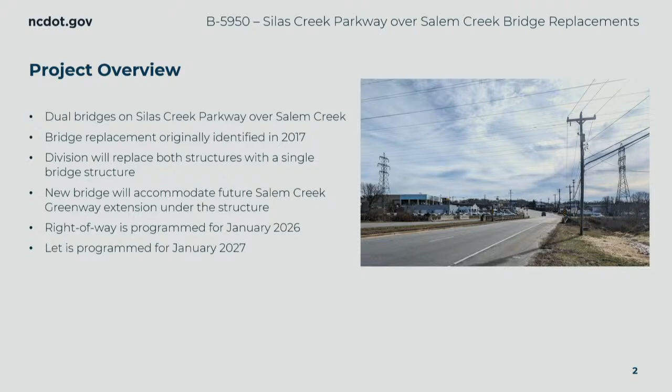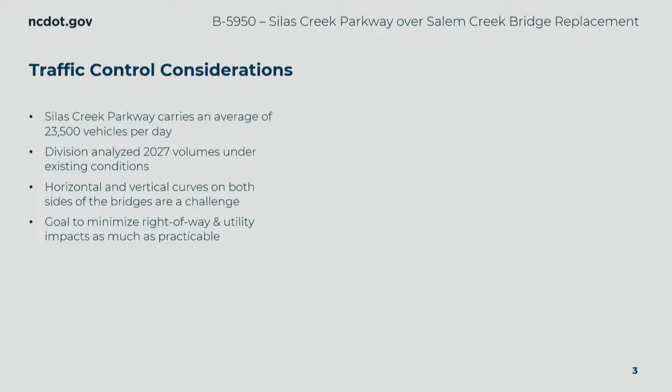As you all are aware, Silas Creek Parkway carries an average of almost 25,000 vehicles per day in 2023 volumes. So we took the current traffic conditions and forecasted them out to 2027 to look at traffic conditions in a no-build situation. The graphic before you shows level of service values using 2027 volumes. If you travel this section of road in Winston-Salem, you probably are familiar with some of the values you see. Relatively speaking, the intersections function well, but there's obviously a delay during peak periods.

Some of the challenges we face when looking at replacing these structures is the geometry of the roadway coming in and out of the project site. There are horizontal and vertical curves on both sides that present challenges. There's a lot of commercial activity within proximity of the bridges, so our goal is to minimize right-of-way impacts to those businesses. There are also a lot of utilities, including 3 large Duke transmission lines that run overhead of the structures, presenting some unique challenges with respect to utility conflicts.

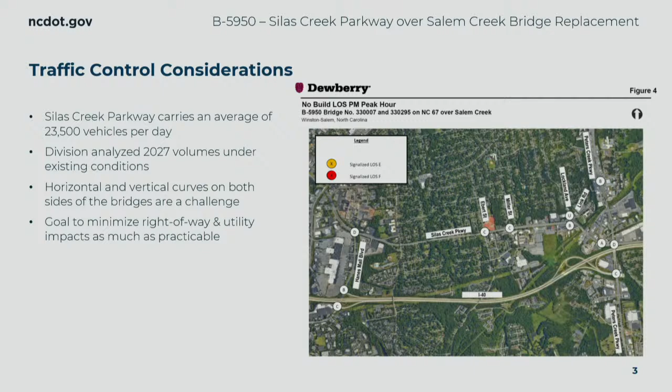So the division first took a look at potentially staging construction of the bridge replacements. What we would do is put traffic onto one of the bridges while we constructed a portion of the new structure. We could either reduce Silas Creek Parkway to 1 lane in each direction, or we also looked at detouring 1 single direction. Particularly when you close the westbound direction and try to detour it back in, tying that into the Lockland Avenue intersection becomes almost physically impossible.

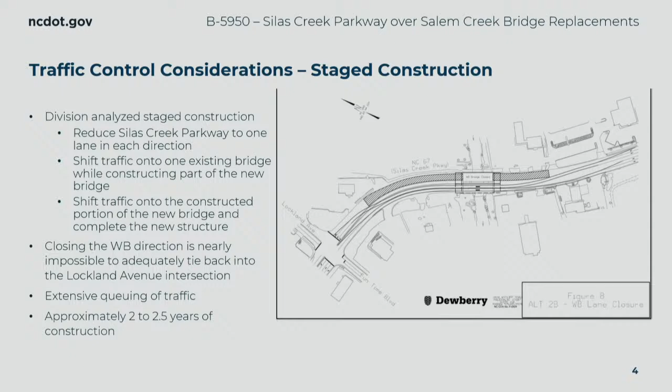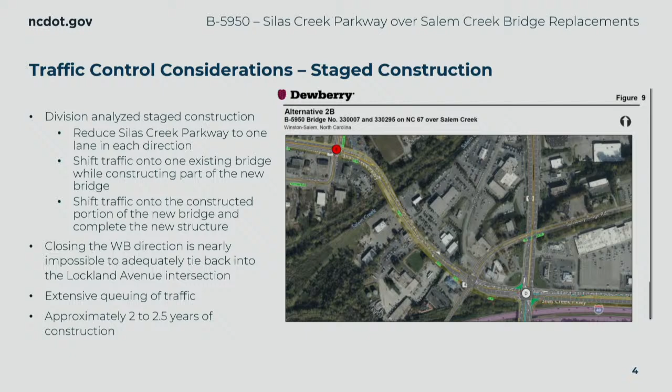We also saw in our modeling some extensive queuing of traffic. It's a little hard to see here, but this shows the AM peak hour detouring 1 direction, and traffic backs up all the way from Lockland through the Peters Creek Parkway intersection almost to Buchanan Street. The other thing we find is that to construct the bridge this way would take more than likely 2.5+ years of construction.

So we shifted away from one lane each direction and then looked at detouring just one direction. You could flip eastbound or westbound, maintain two lanes in each direction, but detour the other. What we find is the pain is very similar to putting Silas Creek Parkway into one lane each direction. You see similar level of service values, and your delay times and travel time impacts are roughly the same, and you're still stuck with a construction duration of 2.5+ years.

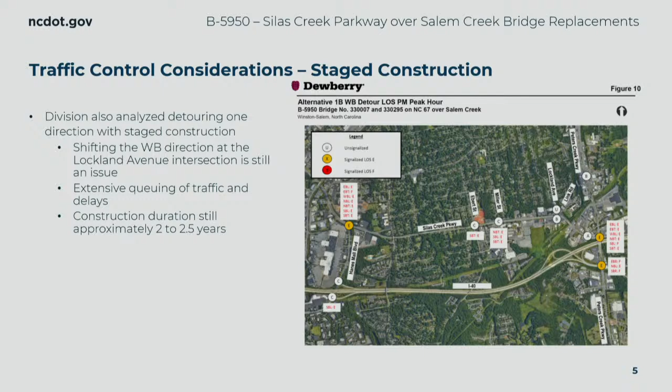So to summarize what we're seeing in stage construction: we have poor level of service within the project impact area. When you shift traffic into these configurations, it limits access to businesses in proximity to the project. The driveways are so close it would be very difficult to maintain all access points in this configuration. Because of the separation required between the existing structure carrying traffic and the new portion being built, we'd see wider right-of-way impacts and more utility impacts. And again, we're looking at 2.5+ years of construction.

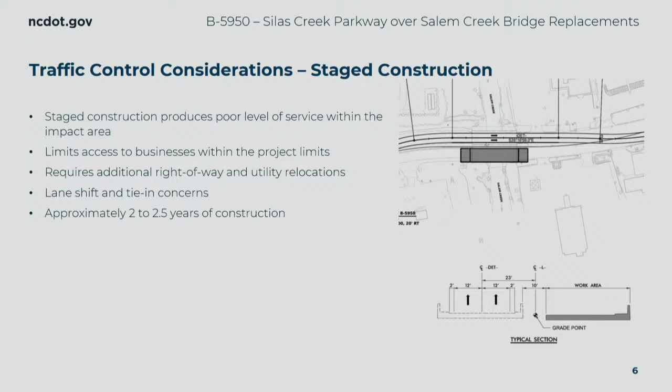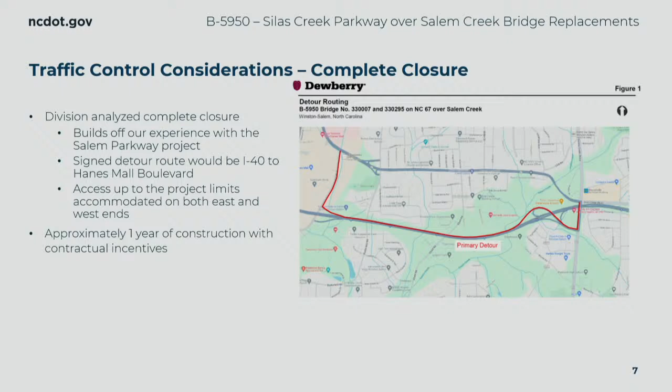So we asked the big question, drawing on our experience from the Salem Parkway project, Business 40: what would happen if we closed Silas Creek Parkway to replace the bridges? We would sign a primary detour route using Peters Creek Parkway, I-40, and Hanes Mall Boulevard. We could accommodate access to commercial entities up to the project limits on both the east and west ends. Most importantly, we could reduce the construction time during full closure to approximately one year with contractual incentives. We talked to contractors actively working for us who have done a lot of these projects, and they agreed a one-year time frame with a complete closure would be doable.

But as you can imagine, that's pretty painful. You see a lot more red on this graphic than in previous ones. What we did here is assume that all 25,000 vehicles per day would use the primary assigned detour route, modeling a worst case scenario. What we learned during the Salem Parkway project is that people find a way—local traffic will utilize alternative routes. But for the purpose of our analysis, we felt it important to see what we can do assuming all of that traffic.

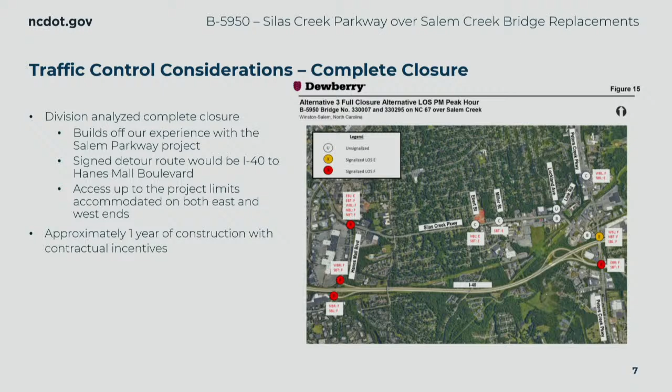So we had our Dewberry team look at mitigation measures—things we can do within this impact area to mitigate the full closure. This is our first pass at potential mitigation measures: simple things like signal timing adjustments along the corridors, restriping existing lanes, and changing signal phasing at key intersections to utilize as much existing pavement as possible, handling turning movements that get turned upside down by the additional traffic.

What we found is we can get the intersection level of service and delays roughly to the same level as in the stage construction scenarios, but we can do it faster—painful, yes, but completed in half the time or better. We feel there may be more we can do; this was just a first pass, and as we get further into design with Dewberry we'll continue looking at options. These mitigation measures would be part of the construction contract and implemented prior to the closure.

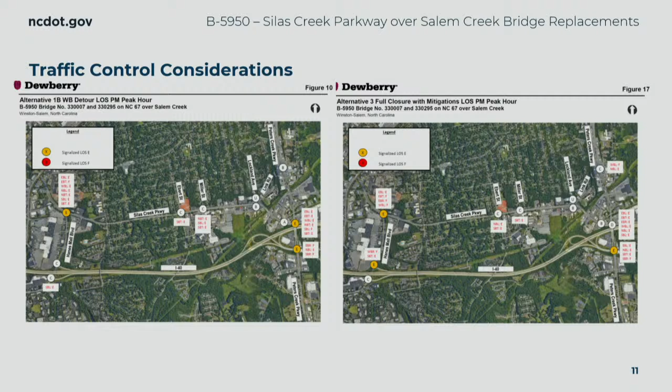So some next steps - what we envision, it's January of 2024, so we're a long ways away from that right-of-way date, but we started planning this project early because we knew this was going to be a challenge. Dewberry is going to proceed with that full closure design, matching roughly the existing footprint of the two individual structures.

Probably the next big ticket for us is trying to identify the utility conflicts, particularly the impacts from the transmission line. Where that has an impact on us is more around constructability - the ability to get equipment underneath those lines and clear them in order to build the bridge.

The other really important component is public outreach. Our vision at this point is some targeted meetings with the businesses within the project area. We want to meet one-on-one with those businesses and talk about access to them during the closure - what can the department do as part of the project to help allow that, and try to get out in front of some of those questions. We also want to meet with some of the institutions within the impact area.

Forsyth Tech obviously stands to be impacted by what we're proposing, and of course Novant Forsyth Medical Center. We've also been talking with Mr. Fansler and Winston-Salem DOT about the WSTA route that runs on Silas Creek Parkway, trying to figure out how we can accommodate that during the closure. So we're trying to do that outreach early and find out what concerns these institutions may have and how we can try to address that.

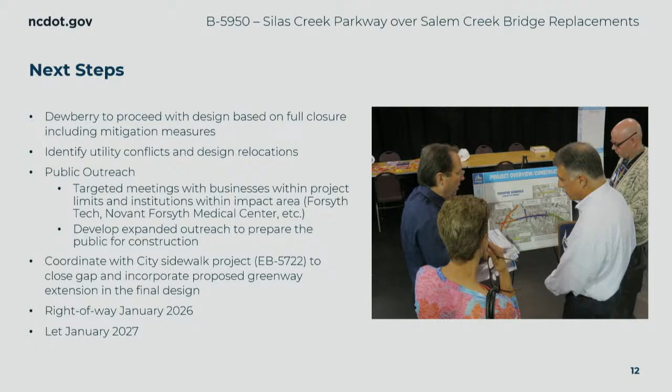That's all I had, and I'm more than happy to take any questions and try to answer what we can. If we don't have the information today, we'll certainly try to get it back to you. Great, thank you Ryan. Yeah, questions from committee members?

Councilmember Scipio: Yes, just to be clear, our roads are so well constructed there's oftentimes you don't notice there's a bridge, so I was sitting here trying to figure out exactly where on Silas Creek. The only thing I could think of is down near Bob King Auto. That's correct. And Quality Oil - yes, that's about where that is. But to replace that bridge, it looks like you're having to go all the way up.

Are you going to go beyond Ebert Street? No, our project limits will probably stop short of the Lockland Avenue intersection. And our goal at this point - you mentioned the Quality Oil site - there's a Shell gas station that sits out in front of Quality Oil's facility there. Our goal would be to try to tie Silas Creek Parkway back in before we get to the gas station, since their tanks and facilities sit very close to the existing roadway. We'd like to avoid any impacts to their site if at all possible.

Yeah. Thank you. Other questions? Councilmember Mundy? I want to make sure that committee members have had an opportunity.

I don't think we've met, but I'm Kevin Mundy, council member for the Southwest Ward. So I've got a couple of questions. One was where you would start and stop, which you've just answered. At what point would you address the businesses? Because I always worry about them hearing it from somebody other than us.

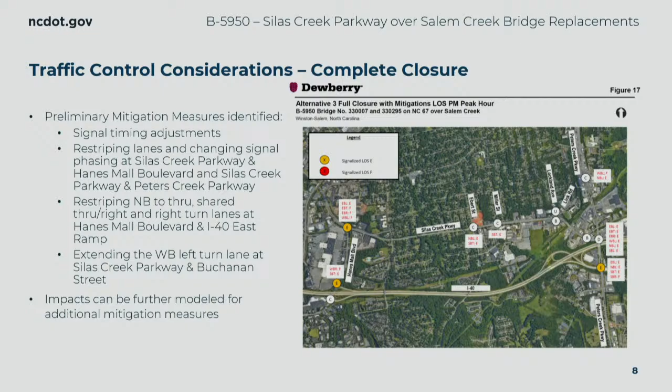There's only so much you can do at the off-ramp from I-40 at Peters Creek Parkway. It's another location where we're physically constrained—we have 2 left turn lanes and a single right turn lane. So one mitigation measure we're looking at is restriping that center lane to be a left and a right, which would give more right turn capacity there. But again, we're physically constrained due to the water feature just off the off-ramp.

I understand why we can't use Link Road since it's a 2-lane road, but I'm concerned about backing traffic up onto I-40 as we feed it on for that section and try to get on the off-ramps and on-ramps. The problem we may have—it's going to be difficult, and you're going to have to start constricting traffic further out, giving people time to adjust, because it's going to be like a traffic jam there. As you know, the traffic there at 4 o'clock is horrendous anyway.

In our modeling of the mitigation measures, we are stacking on that ramp, but it didn't get back to the main line on 40. We're assuming all of that Silas Creek Parkway traffic will be on that detour route, and the hope would be that local traffic would choose an alternative and not use the primary route—eventually, they will.

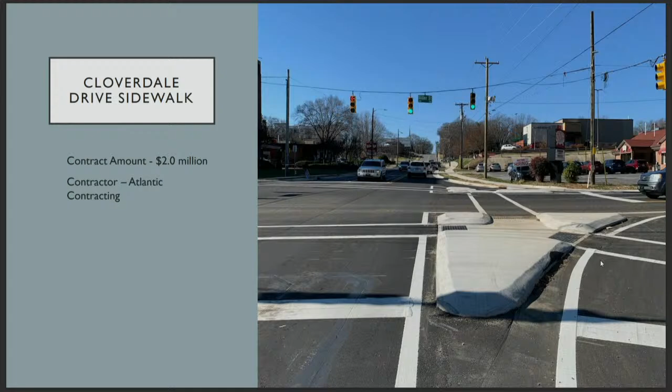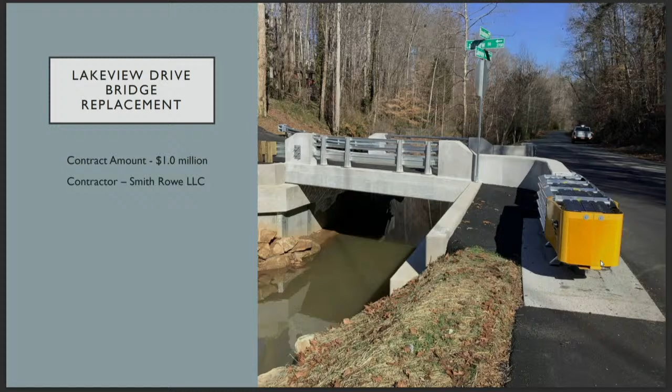The Easton Elementary Mobile Unit has been completed. Bellevue Recreation Center has been completed. The contractor is working on some punch list items out there, so it's not in operation yet, but it will be shortly. Fire station number 3 has been completed. Again, contractors working on punch list items. Once the fire department moves out of the old station and into this new station, we will be tearing down the old station. So you will be seeing work continuing out there.

And then on to some projects we are currently working on. Just an update on the Union Station's second floor remodel. After I updated you a few months ago on this one, Winston-Salem State approached us. They've had quite a bit of turnover in their staff. Some of their needs have changed since the original design was made on this. So the architect is currently working on making some small revisions to the plans. It's some stuff of deleting some walls to create some more open space for cubicles and things like that. It's not major changes.

Meadowlark Drive widening. Hopefully you've been out there this fall to see that the contractor has made some significant progress on this project. We do have an estimated completion date now of October of '24. We continue to push them to meet that date, and if progress continues like it is, we think they will, prior to Election Day.

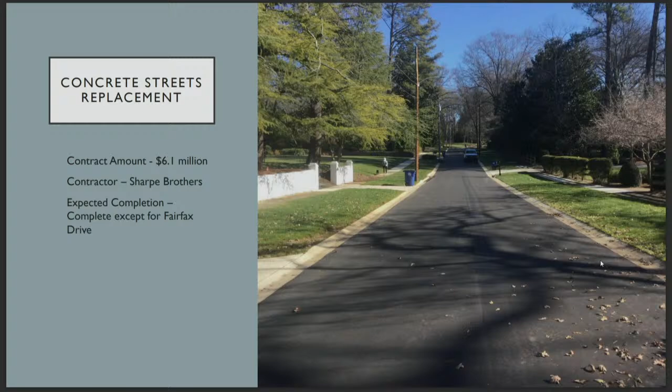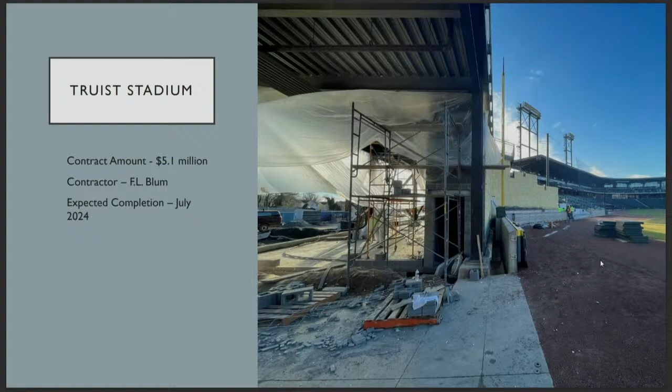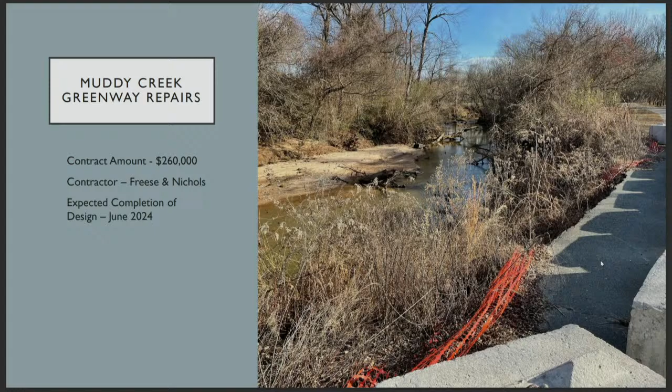Just some short updates. The Washington Park Picnic Shelter is the replacement for the one that burned. The contractor has mobilized and fenced off the area, but they're still waiting on some materials, which are specialty products coming from out of state. Once they get their materials, they'll start construction.

Petrie Road and Cedar Trails sidewalk projects are currently out to bid. Bid opening is next week. Assuming we get 3 valid bids, we will hopefully bring that to you in February for approval.

Little Creek Greenway extension will be going out to bid in February or March. That project's been around a while, so we'll be glad to get it under construction.

Martin Luther King Jr. streetscape improvements. We have been meeting with Duke Energy the past couple weeks to try to come up with a plan for them to start work on the lighting replacement out there. That's our top priority because it's a safety issue.

First Street Bridge replacement - I believe there's some property acquisition on the Finance Committee agenda today, so that's starting the process. That's a federally funded project, so there are a lot of steps we have to go through to get everything approved. Right now we're tentatively looking at the end of the calendar year, hopefully, for construction to begin.